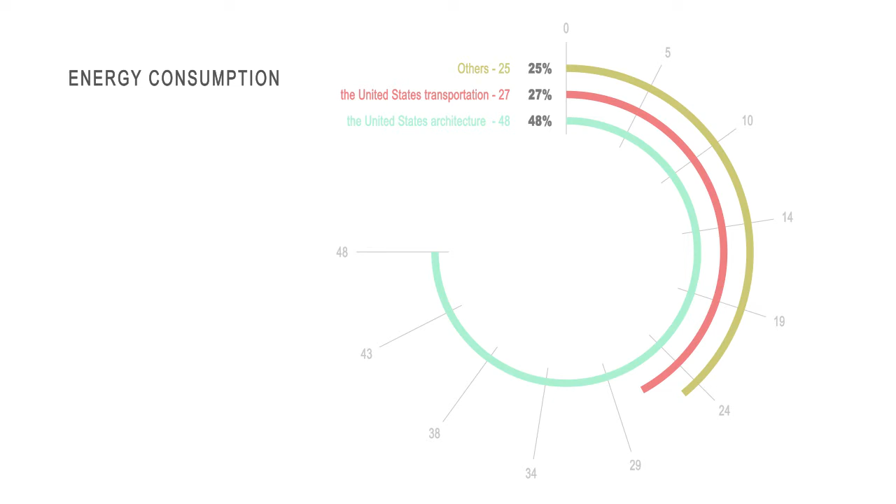But what can architecture actually contribute to sustainability programs all over the world? A lot, it turns out. In the United States, architecture consumes 48% of the total energy resources, as opposed to the transportation sector, which only accounts for 27% of energy consumption. By carefully designing sustainable architecture, we can therefore make a significant impact on our planet's non-renewable energy resources.

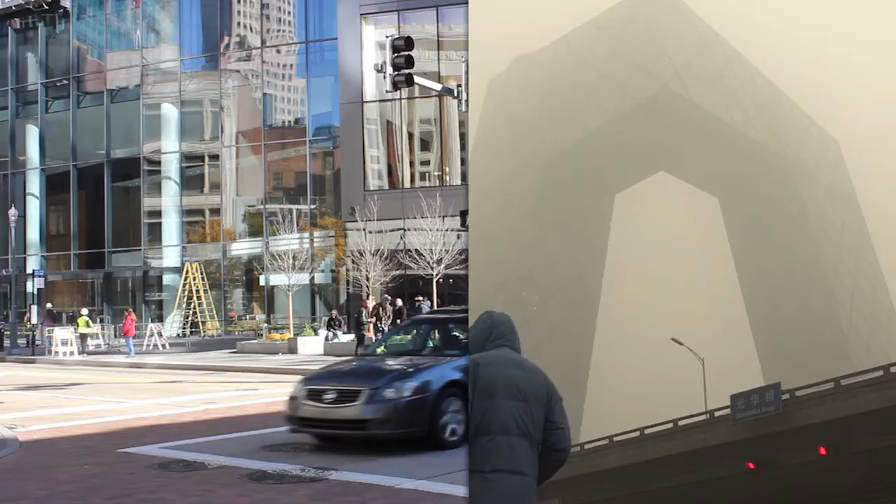In the coming years, effort made by US and China towards sustainability will be key for the success of global environmental improvement. My research looks at how contemporary architecture in these two countries is responding to the challenge of sustainability. I also chose to compare buildings in Beijing and Pittsburgh, as these two cities are on the same latitude and therefore share similar climates.

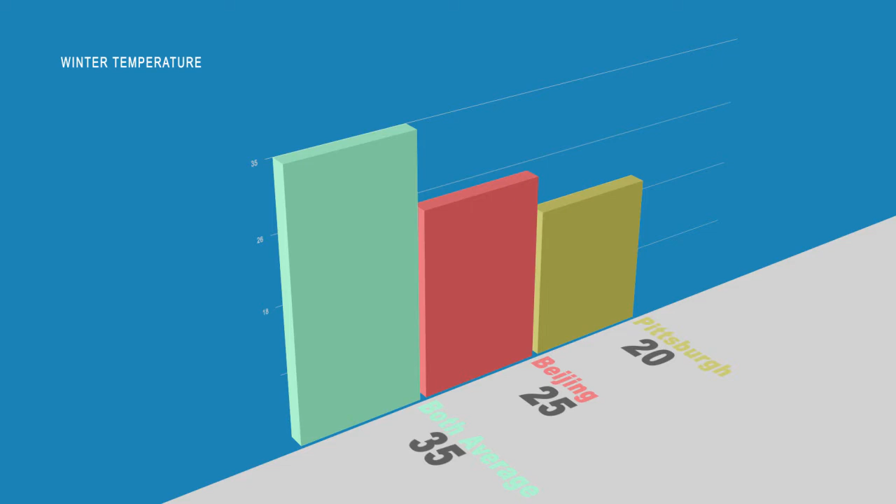The average winter temperature is 35 Fahrenheit for both Beijing and Pittsburgh, with temperatures reaching a low of 25 Fahrenheit for Beijing and 20 for Pittsburgh. The average summer temperature is 75 Fahrenheit for both cities, with temperatures reaching a high of 81 Fahrenheit for Beijing and 80 for Pittsburgh.

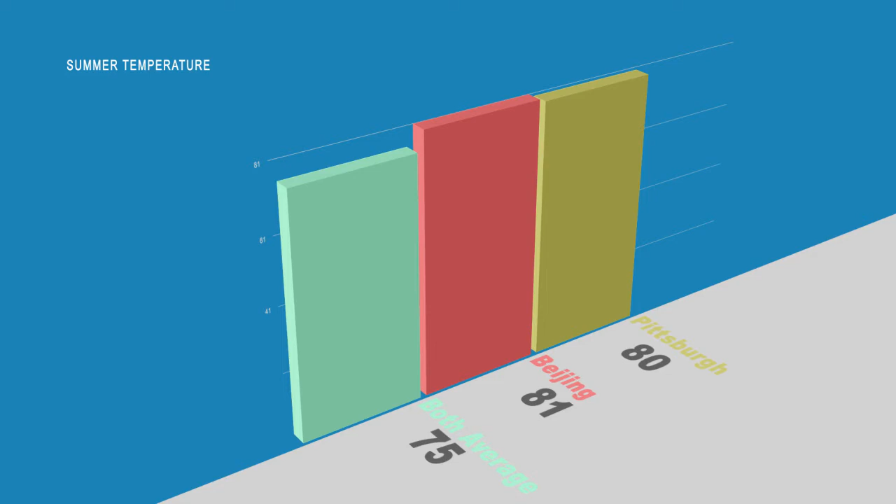Both cities either were or are heavily industrial cities, so they face similar challenges regarding air pollution and other environmental problems. Thus, looking at these two cities' sustainable architecture can be very useful to understand these two countries' approaches towards sustainable solutions, as well as to be used as toolkits for other countries to shift their sustainable focus.

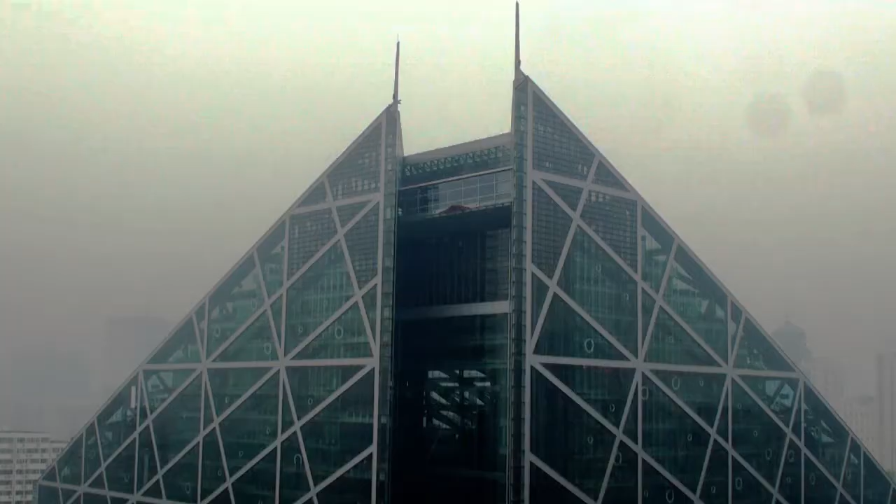The tower at PNC Plaza in Pittsburgh and the Parkview Green Mall in Beijing are two recent green buildings, representing the highest standard of sustainable architecture in the US and China. Parkview Green Mall is the first LEED Platinum certified building in China, while the tower at PNC Plaza received a sustainability rating that went even beyond the LEED Platinum certification.

In order to understand sustainability measurement, let us first look at the two standards that have been widely used in each country. LEED in the US stands for Leadership in Energy and Environmental Design, and GB in China stands for Assessment Standard for Green Buildings — two very different standards.

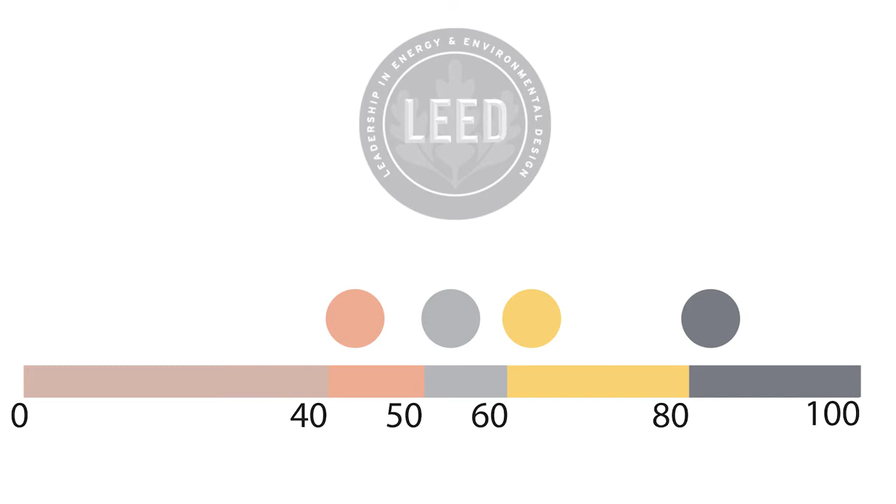The US LEED rating system was established in 1993 by architects, manufacturers, and policymakers. It is not a governmentally mandated or managed system. LEED has 4 different levels: certified, silver, gold, and platinum, with scores from 0 to 100. Points can be earned from 8 categories: location and transportation, sustainable site, water efficiency, energy and atmosphere, materials and resources, indoor environmental quality, innovation, and regional priority. However, these 8 categories are weighted differently.

From energy and atmosphere, location and transportation, and indoor environmental quality — these 3 categories — a building design can earn up to 65 points, which is already gold level. These 3 categories are more responsive to climate and energy issues, while the other categories are designed to create an environmentally-friendly area. LEED is an aspirational status rather than a policy-regulated requirement.

Architects will often encourage their clients to pursue a better living environment and long-term savings by applying the LEED system to their buildings. There are some reasons that LEED attracts so many architects and clients to put more money into their projects. Similar to the LEED system, GB has 3 different levels of stars to represent the levels of sustainable architecture.

In contrast to LEED, however, GB is a government-mandated sustainable program. All buildings in China have to correspond to the minimum GB rating of sustainability. In other words, in order to get star certification through the GB system, all buildings in China have to fulfill GB's minimum requirements first before they apply to the star system.

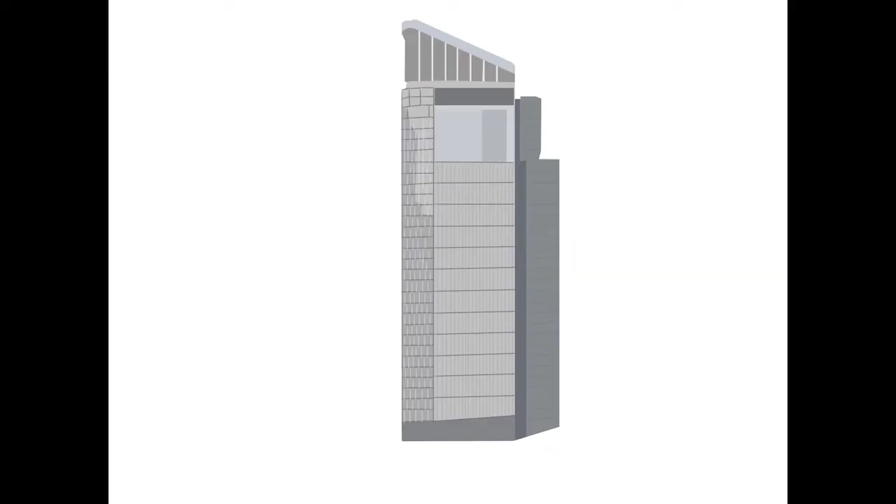The architects of PNC Tower pulled back from the property line to provide a larger public space in the busy downtown area of Pittsburgh. People in downtown Pittsburgh can come to this community space to interact with PNC Tower more by looking and even walking inside of the building, encouraging the urban community's interaction with a green building that has surpassed the LEED certificate ratings, which also increases awareness regarding sustainability.

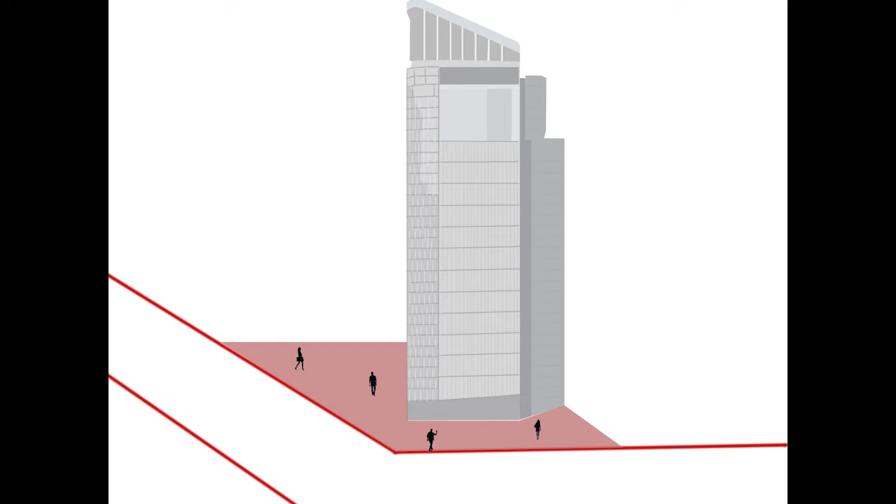In a similar response to community, the architect of Parkview Green Mall designed a bridge penetrating into the mall, connecting two places in the community, serving as an actual entrance as well, to provide convenience for people in the community who will not use the building for shopping nor working.

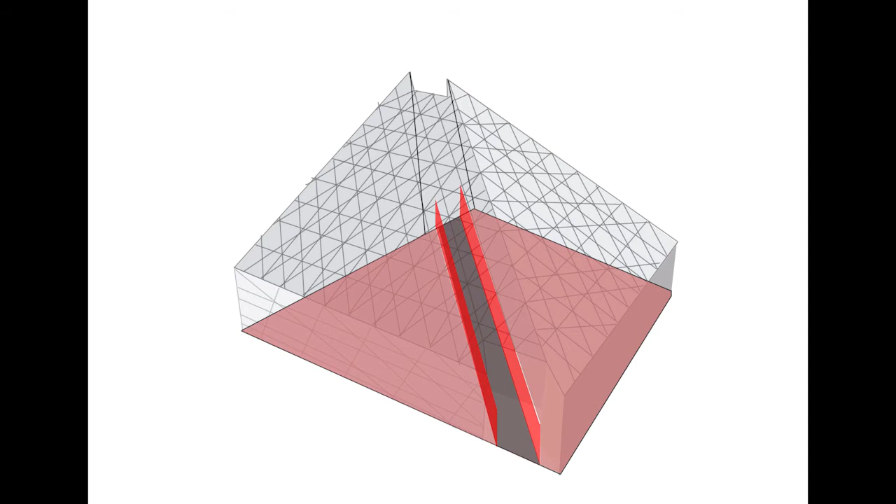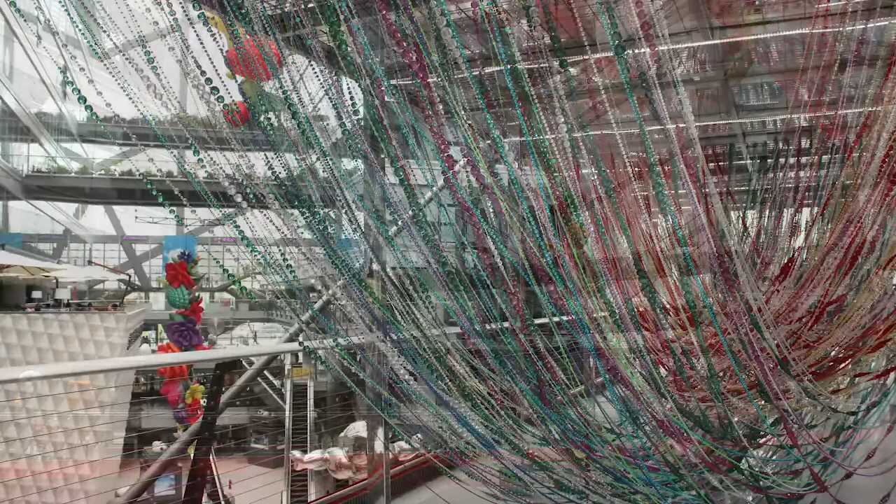With the bridge, people can save more time daily from staying outside in extreme weather. Besides convenience, the bridge also has a lot of sculpture, which makes it a more attractive space to be in and provides a comfortable experience for people as they walk their way out. Like the PNC Tower, as more people are exposed to green design that is also aesthetically advanced, more awareness can be built for sustainable issues.

The architects of PNC Tower and Parkview Green Mall understood sustainability from the ecological, social, and economic aspects, which is what I truly believe defines good sustainable architecture.

The PNC top 3 ratings in the LEED system are energy and atmosphere, materials and resources, and indoor environmental quality. Parkview Green Mall's top 3 ratings in the LEED system are energy and atmosphere, sustainable site, and indoor environmental qualities. Thus, we can tell that for these 2 buildings, energy saving and indoor air quality are the most important components of sustainability.

The reason they have differences between the material and the sustainable site categories is that PNC Tower installed a lot of recycled and local materials for the furniture. In contrast, Parkview Green Mall has larger public spaces and open spaces which preserve a more sustainable site.

Central ventilation system is the major sustainable strategy that was applied to both buildings. It is designed to bring as much fresh air as possible into the building to cool it during the summer and use other technologies to heat the building during the winter. Both buildings also use a multiple layered facade or roof that functions like breathable skin to preserve energy in the building.

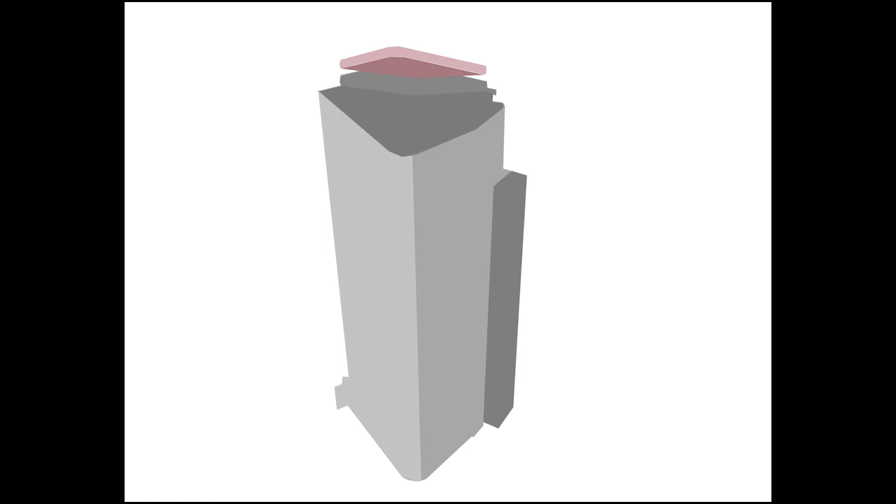For its ventilation system, the PNC Tower uses a solar chimney, double skin facade, and active chilled beam for air circulation. During the spring or autumn, cool air is drawn from outside the building, passes through air filters, and travels across the lower part of the office. Furniture is raised up on feet to allow the cool air to circulate without obstruction.

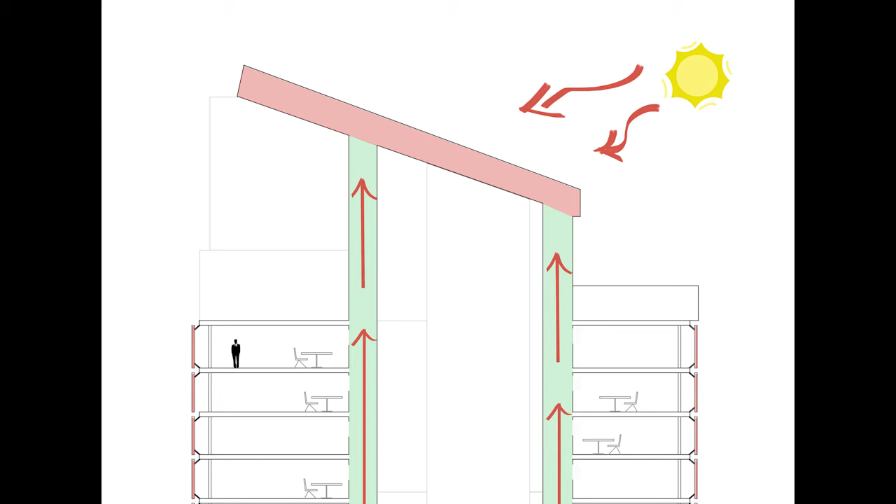Hot air from the office is directed into the central shaft and towards the solar chimney. When the sun hits the solar pad on the roof, the chimney becomes warm and creates a natural vacuum by which air in the shaft is drawn upward. The result is a looped air current that constantly draws fresh air from outside and circulates it through the building.

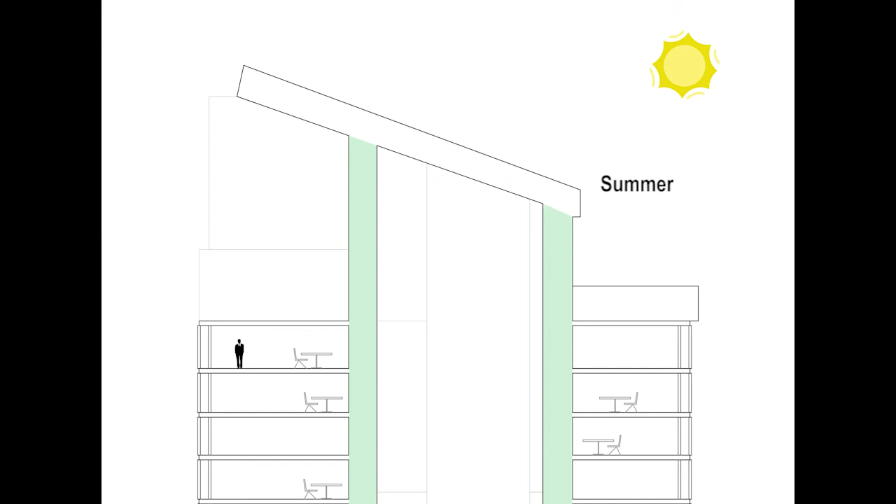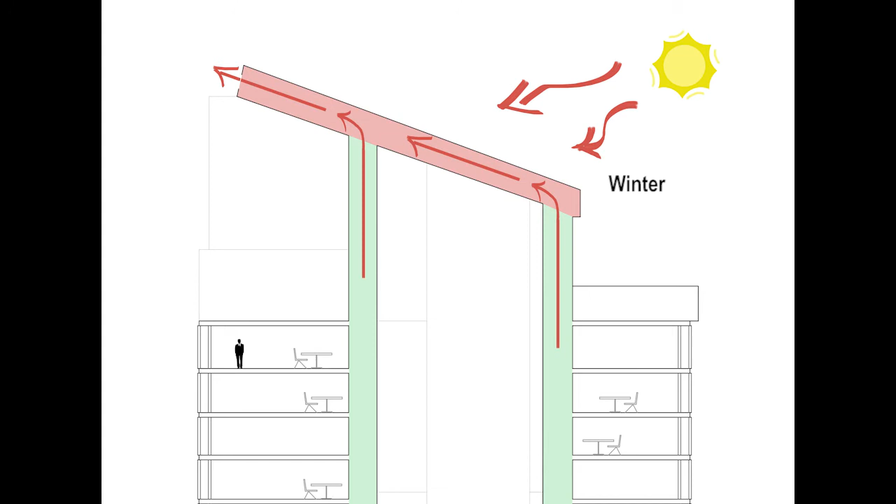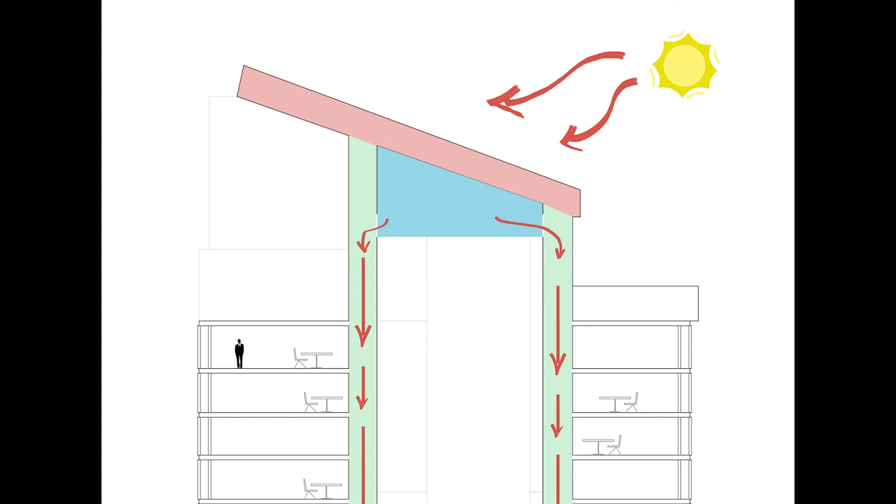The active chilled beam is used only in the summer to cool the hot air. In winter, the building relies on radiant heat in the ceiling and floors to heat the air. The fresh air in the active chilled beam is mixed with the interior air to keep the working area fresh and provide moderate temperature for people working inside. Due to these systems, the PNC Tower can rely on natural ventilation without dependence on artificial heating or cooling for 42% of the year.

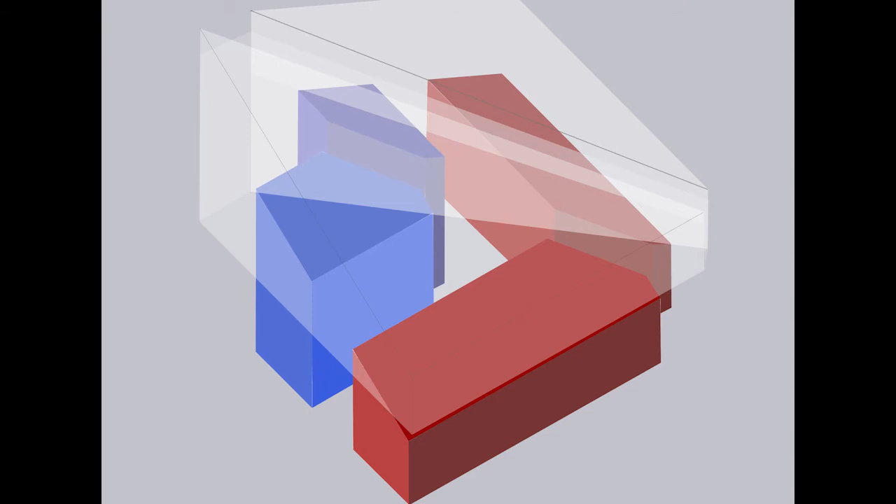Parkview Green Mall has 4 different functions, separated into blocks, which are covered by a huge glass envelope. The exterior envelope is treated like human skin to cover the different functional buildings inside. The gap between the glass envelope and the inside buildings is the perfect insulator to preserve the energy inside of the building. It is also a solar chimney for ventilation that works like the one in PNC Tower.

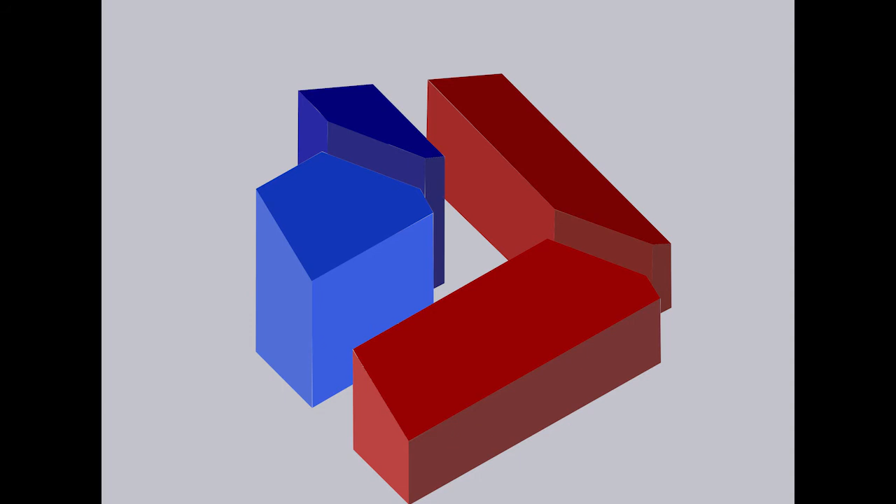The building uses the innovative material ETFE, which is highly transparent with the energy, so it exhibits a high energy radiant resistance and can withstand moderately high temperatures for a long period of time.

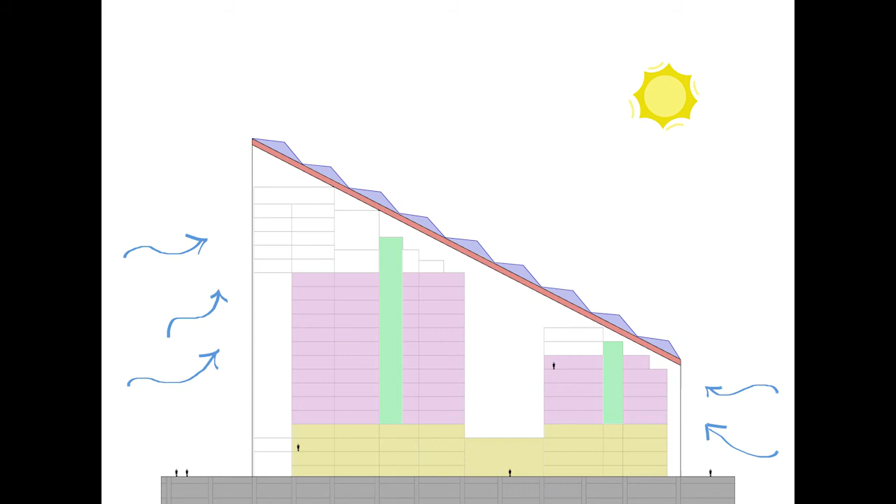Also, in place of PNC Tower's solar pad, Parkview Green Mall has an indoor garden on top of the building. When the sun heats the garden, it draws all the hot air inside of the shafts out of the building. Meanwhile, the plants convert the carbon dioxide drawn inside of the garden and release oxygen back inside of the building.

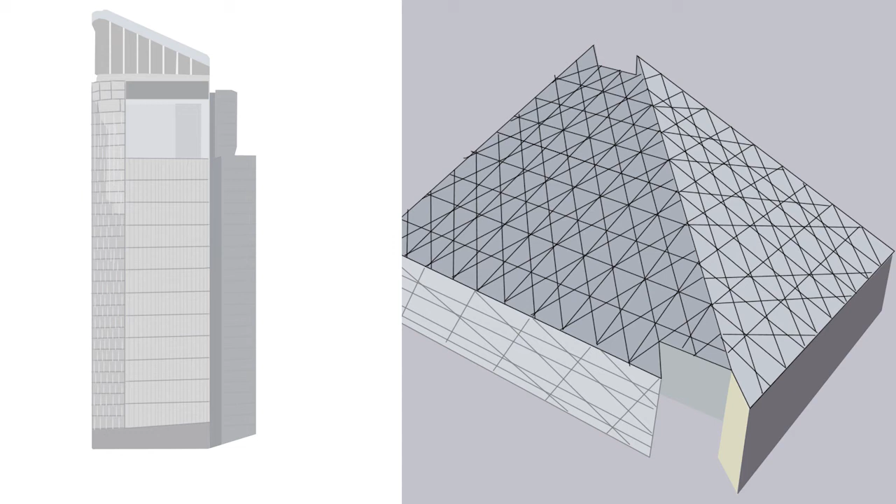Due to the urban complexity in modern society, more people want to meet their needs in limited areas. The architects of PNC Tower and Parkview Green Mall use the idea of multifunctional spaces in an innovative way to achieve this goal. The target community in the PNC Tower are PNC's employees.

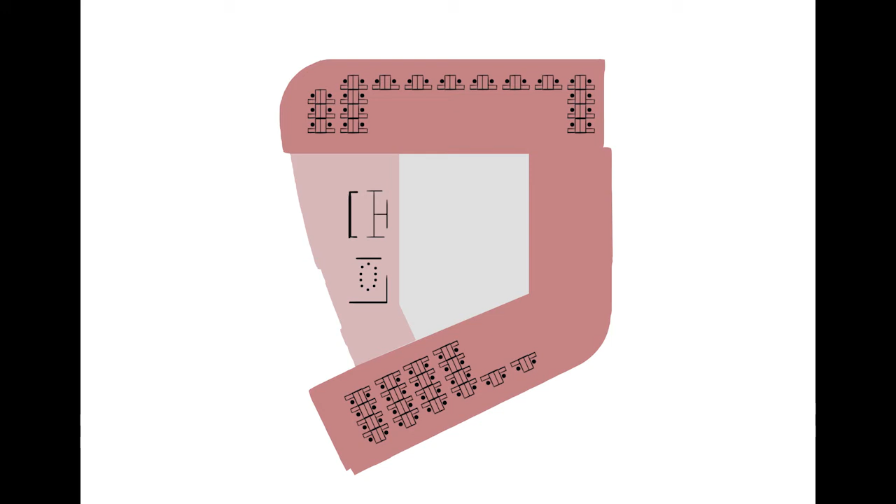They use the building during their work hours, which are from 9 a.m. to 5 p.m. Monday to Friday. In order to create a more collaborative and inspirational working space, PNC Tower's architect designed several community areas with kitchens. These kitchens may be accessed by persons from different departments, thus fostering community spirit and collaboration.

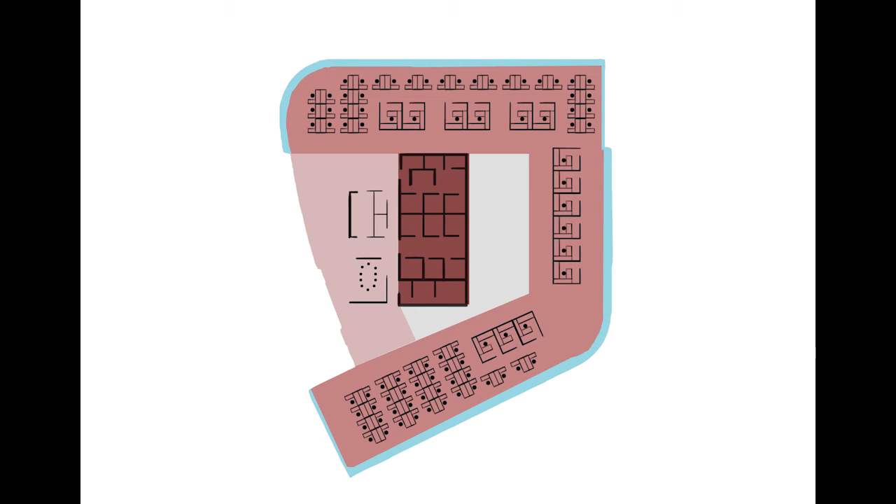They also have a larger community space, which is an indoor garden on the 28th floor in the PNC Tower. A good-day indicator signals when air quality is right, so that employees can open the sliding doors to step out on the catwalk that goes between the 2 layers of facade to increase the quality of life in the building.

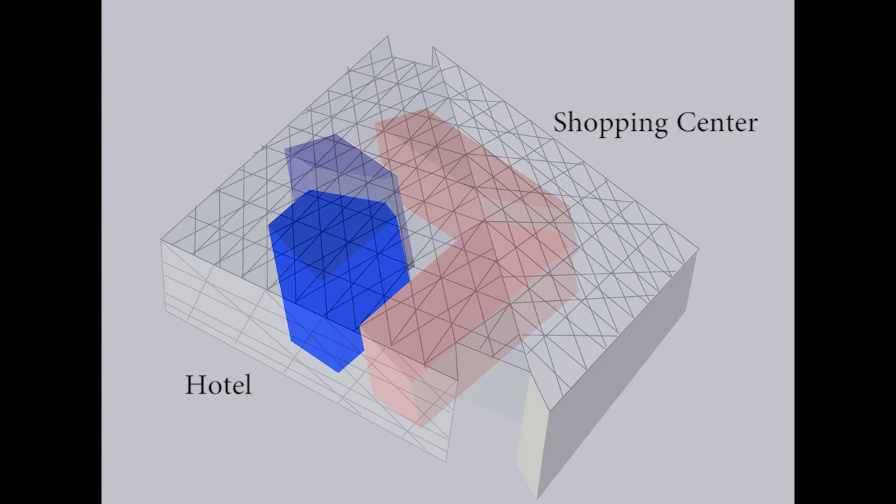In contrast to the same community of users who occupy the PNC Tower, there will be relatively different groups of people in Parkview Green Mall every day. In addition to the Parkview Green Mall's 4 major functions—gallery, mall, office, and hotel—the architect Wen-Ting Shu added components such as the art installation, an indoor garden, and the bridge to diversify the experience for visitors.

The key concept of multifunctional spaces is to create a more dynamic experience by mimicking human behaviors inside a building, with consideration of duration, purpose, and target group of people, rather than adding more and more functions in limited areas. What I really want to address in this video is that sustainable architecture should never be solely about energy saving or resource management, but should equally consider 3 different aspects of sustainability.

The ecological aspect, which relates to the climate and environment; the social aspect, which relates to the communities; and the economic aspect, which ensures the architects and developers receive incentives for green design.

New technologies such as PNC Tower's double skin facade and Parkview Green Mall's ETFE material are important and efficient solutions for climate issues. But sustainable architecture should also inspire those who come into contact with them to make sustainable choices on an everyday basis. Buildings like PNC Tower and Parkview Green Mall show that sustainable architecture can impact environmental issues for the better, while increasing the quality of life for their users and communities.